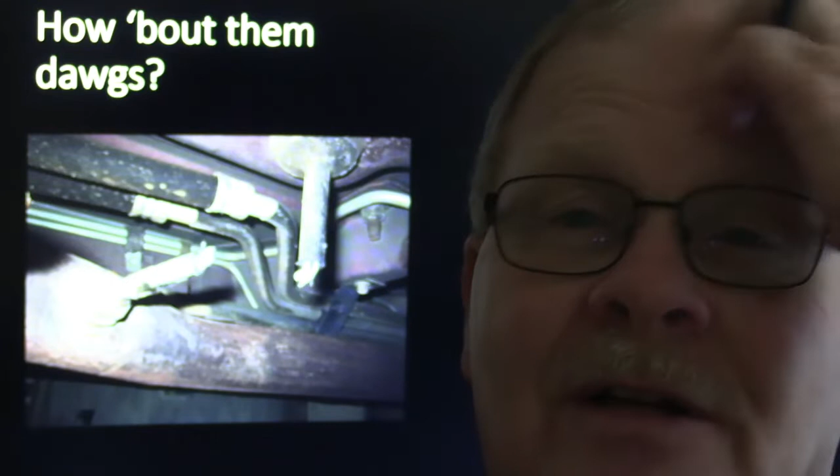Anyway, finally, on this lady's vehicle, after I put that second oxygen sensor in there, I got a piece of steel from the welding department and bent it, put some little ears on it and drilled them, and basically covered this thing up with a kind of steel splash pan so that dog couldn't get to those wires anymore. She didn't have that trouble anymore after that.

This is a choke on a '69 Ford pickup we worked on. I drove vehicles that had chokes on them back in the day, and you kind of had to know how to do that. You pull your choke to start it, and then as you warmed it up within the first minute or so, you worked the choke back shut, pushed it back in - that's actually a factory choke on a '69.

I think up until '72, Ford pickups still had a choke knob you had to pull on the dash, and I believe in '73 they went with an automatic choke of sorts. There were a bunch of different ways they did that, but these vehicles, a lot of them got to where they were like your lawnmower.

You know how you're the only one that knows how to start your lawnmower. If somebody else comes along, even if they're pretty good at getting stuff started, you know the combination - you know how you have to pull the choke, how you have to spin it and wait and do this and that and the other, and you finally get it going, and then it mows the grass good the rest of the day.

I've got an F525 John Deere mower out here, a '91 model. It doesn't take anything special, but it had a little starter solenoid and a small motor starter, with a little Kawasaki engine, oil filter and all. Pretty cool commercial grade mower.

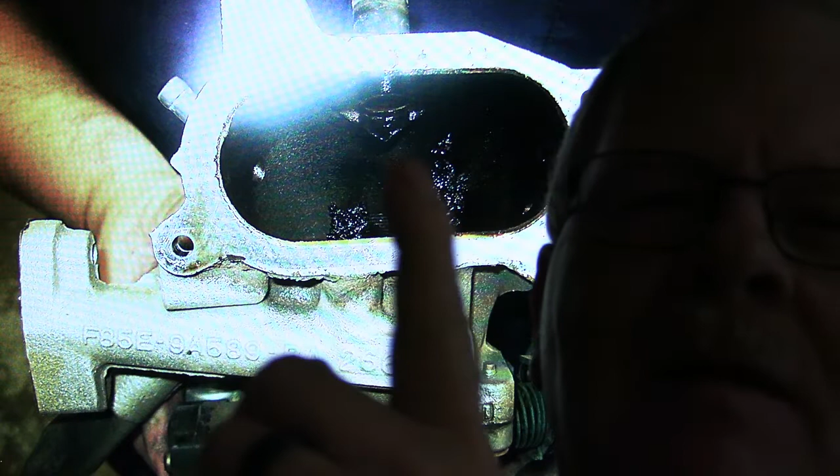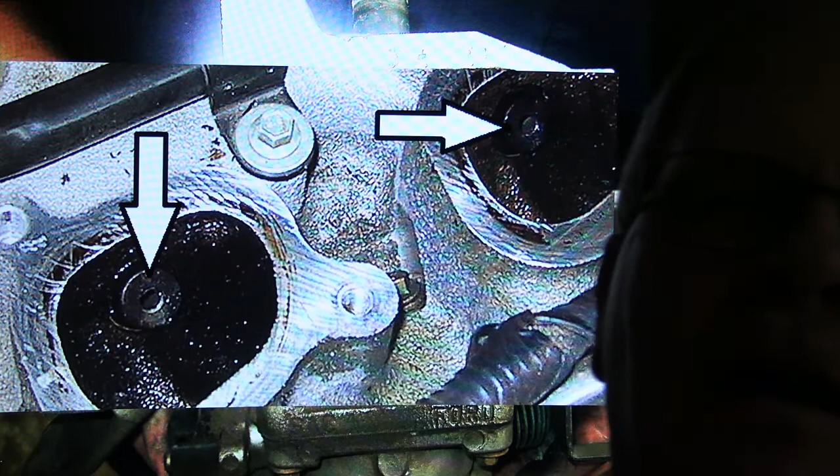Remember, if you try to flow EGR and you know the EGR valve's opening but the engine doesn't change sounds, you know you got an EGR flow issue, and typically it's going to be something like this right here on this Ford pickup. You see them big mountains of sludge that come up in there because of the EGR. It's a gummy, sludgy mess that likes to clog up all kinds of stuff. It also clogs up these little ports where it's got one feed to each, like on this 3.8. If all of them clog up but one, that one will misfire when the EGR valve opens. You'll have a misfire code and it'll shut the injector down while that's going on, and you'll be really confused about that if you're not familiar with how that works.

Another thing, on the gasoline direct injection engines, a lot of the times you'll have some carbon buildup on the intake valves for various different reasons. Of course, Ford and Toyota have started putting MPI and GDI injectors in there to kind of keep that washed off, but they have different strategies in the way that they work. The GDI engines are susceptible to the same kind of carbon buildup as the other ones.

You might remember the olefins that we had piled up on the valves back in the 80s, when they were putting those little black particles of olefin in gas with the idea it would keep the injector clean. Well, that was a disaster because those pieces of olefin would get trapped in the injector and stop it up, baking on there where they wouldn't clean off. Furthermore, those olefins would pile up on the valves and cause cold running problems. I've talked about that before a little bit.

A lot of times you've got carbon buildup in your intake, in your tumble valves and manifold control valves. A lot of times you'll have these valves that basically close most of the air off so that when it's idling, it leaves just a little bitty port in that flapper so the air goes screaming in faster. Then when you need more throttle, it opens up. Well, those get all sludged up and everything.

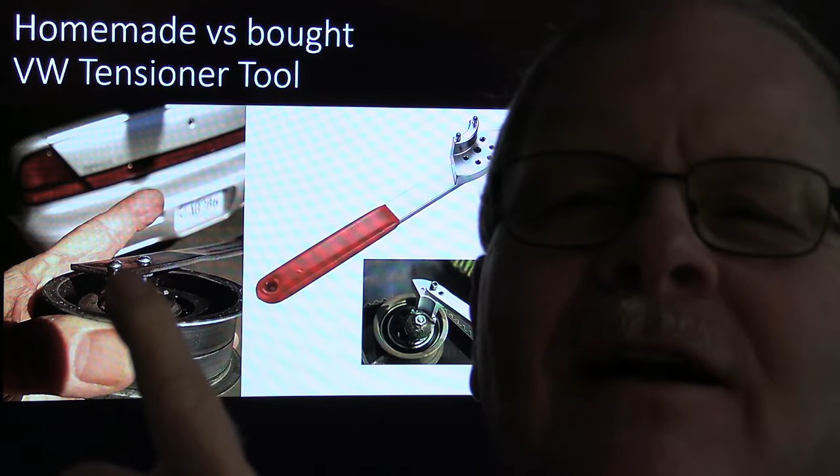However, there are some manifold runner control systems, like it started out in the '89 Taurus SHO, that would have flappers in there that would shorten and lengthen the runners based on what it needed for power and that kind of stuff. That's another story.

This right here, you can see my crummy homemade tool that I made with some bolts and a piece of flat iron to use for Volkswagen tensioners. They make a really good tool you can buy - I think that was made by Lisle on Amazon, and that one is a lot higher quality than this crummy cheap one that I made. But if you don't want to wait for a tool to get there, you don't have to worry about ordering one. You can basically build something that will work. I've got another tool a little bit later I'm going to show you that I built too.

I wasn't but like 18 years old at the time, so they jerked me out of the combine and had me rebuild a couple of those gas burner engines that was in them trucks. One way or another, the truck ran real good after, both of them did, after I built it. So I had to pull the motors out of there and all that.

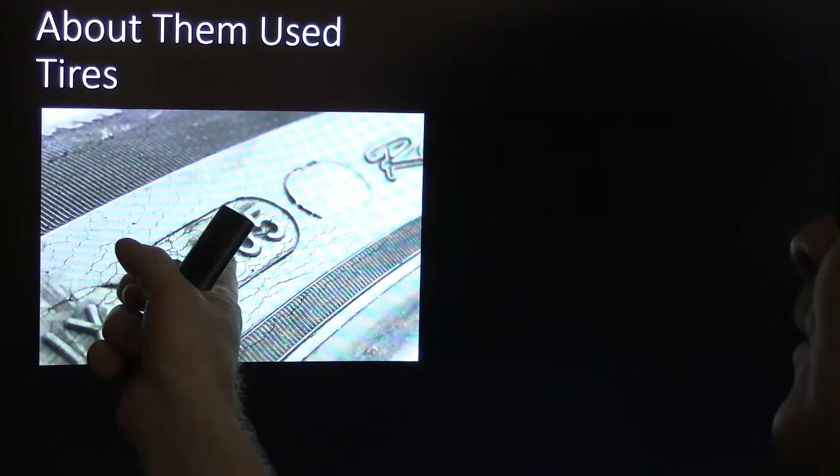I love the way this camera just gets crazy and tries to, you know, get out of focus occasionally.

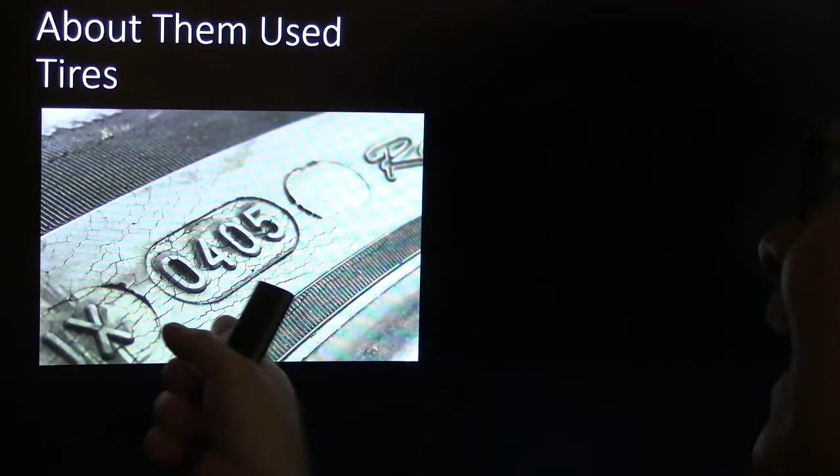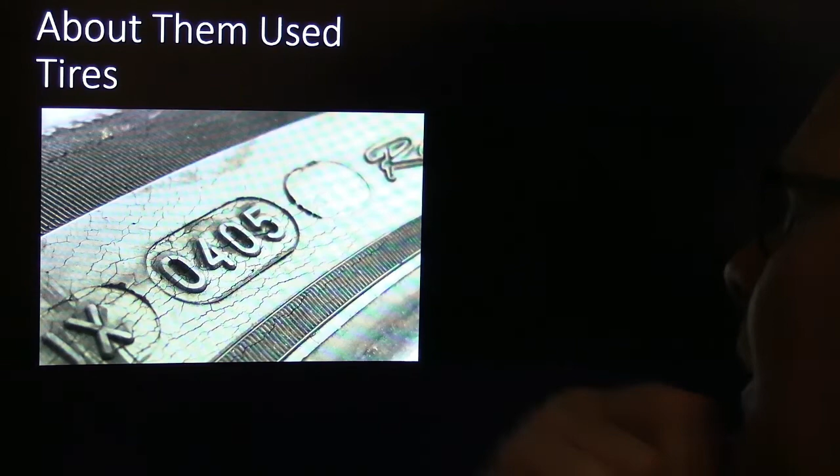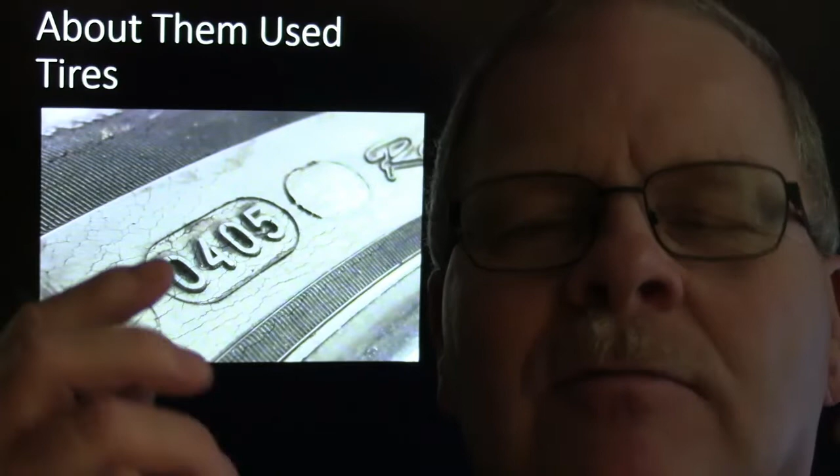And the wacky thing about it was I got my old 80 model Ford truck, and we dragged that thing over to this shop in Ozark, closer by than any other shop I had access to. We got it up on the lift right after we pulled it over there, and we had kind of heated the transaxle - it was like a 20-mile pull. Heated the transaxle up, you could put your hand on the final drive, it was a little warm, you know. But it was a junky old car anyway.

We had to replace the module, and on that one, if I remember right, it was one of the ones that had the crank sensor mounted on the back of the module. It went inside of the block, and you had to go under the back of the motor to do it. But anyway, we put a coil, a module, and a crank sensor on there, and it fired off. He never had any more trouble with it, at least until he got rid of it.

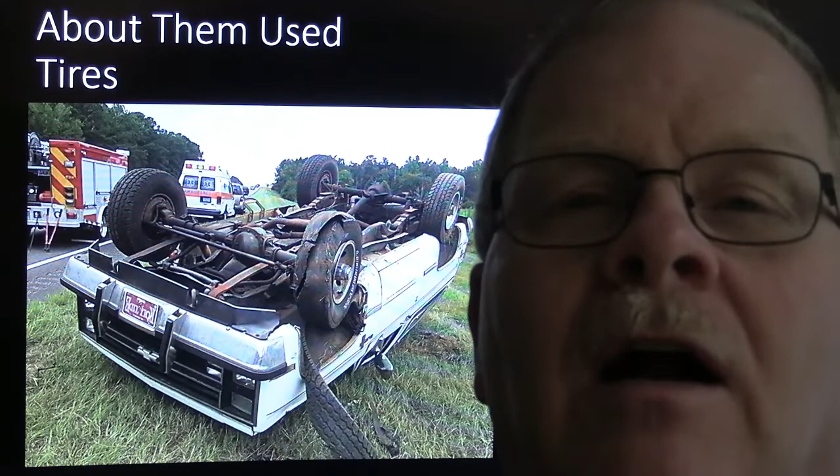Whenever tires are expired - and I've had other videos about this tire right here - whenever you look at these numbers, this was, see that, 04, 05. As I remember, that's the 4th week of 2005 when that one was made. And so, golly, that's confusing there - it could be the 5th week of 2004. Look that up, make sure I'm telling you right, that's stupid, I used to teach that. One of those numbers is going to be the number of weeks into the year it was made, and the other is going to be the year model. I can't remember which way it is right now, but either way, you can see all these cracks. Even if a tire's been stored in an air-conditioned warehouse with a bunch of other tires, and it still smells like a new tire, if it's more than 6 years old, you don't need to be using that tire on anything.

This is kind of the thing that happens on that. This was one of my students. He drove this '88 Blazer, and he was really happy with this thing. He had spent a bunch of time fixing the power windows and all that, and was fixing it up.

One day he didn't show up for class, and I sent him a text and said, "Where are you at, Daniel?" He sent me a text back with this picture, and you can see the tread came off of one of his tires. If you look at these other tires, they're about the same age and they all look really good. But the tires were so far expired, and the last thing on his mind was a tire throwing a tread and causing him to flip that thing over. Totaled it out. Didn't hurt him, he was okay. But that's one of the reasons you need to pay attention to those tires.

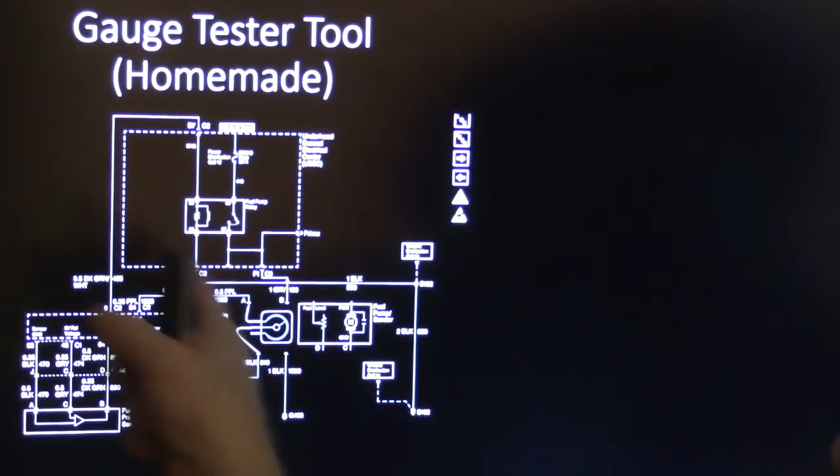Somebody else came back from town the next morning when we were loading up. That was all forgotten, and somebody started the motor up and burnt the engine up. So anyway, it had to have a crankshaft after that, but I guess that was the breaks of the ball game. I learned a heck of a lot from that 18-year-old experience.

I mean, I could rebuild an engine, but I double-gasketed an oil filter. Part of it was I couldn't see down in there. The other part was because I was sick when I did the job. So anyway, a lot of times we like to tell the story like we never made any mistakes, but everybody has made a dumb mistake sooner or later. Got to figure that out.

This is a little homemade gauge testing thing I used with a piece of speaker wire. I basically got the connector that I cut off of an old fuel pump, and I would plug that into the wire harness. On the other end of that thing, I had this potentiometer.

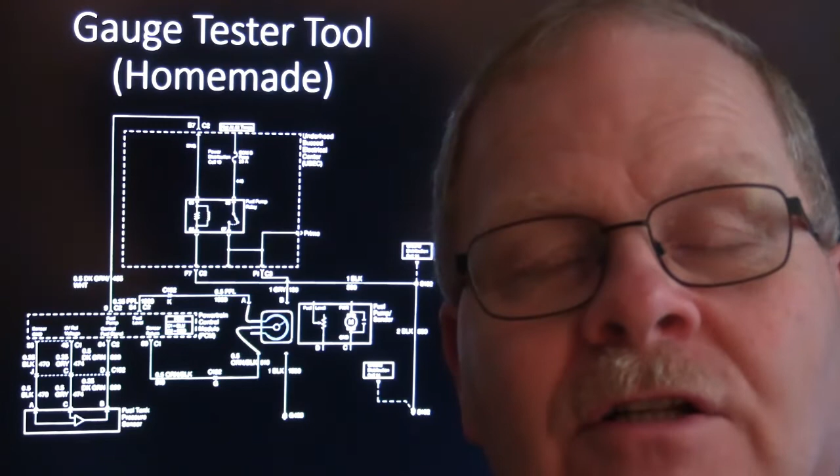You see a little potentiometer right there? I had a potentiometer that was spec'd with about the same kind of range, something within the window that it would operate the gauge. So I could plug that in back there where the fuel pump and gauge were plugged in, and with that long wire, I could go up there, sit in the seat, and turn the key on.

I could turn it because of the slosh part of it. You turn the key off, reset your little pot, turn it back on. You can actually measure the pot with your meter while you're doing this, and watch the gauge to see if it works. It's like a homemade gauge tester.

Now, there's been gauge testers made for years that have 3 little pots on them where you can turn them this way and that and dial in the resistance you want. I just needed that one pot. I got the idea from that, but I made my own that way.

Basically the way it works is this right here. You've got your gauge right here. This is like on a 99 GMC, because it's basically talking to the powertrain control module, which is sending information to the cluster and all that.

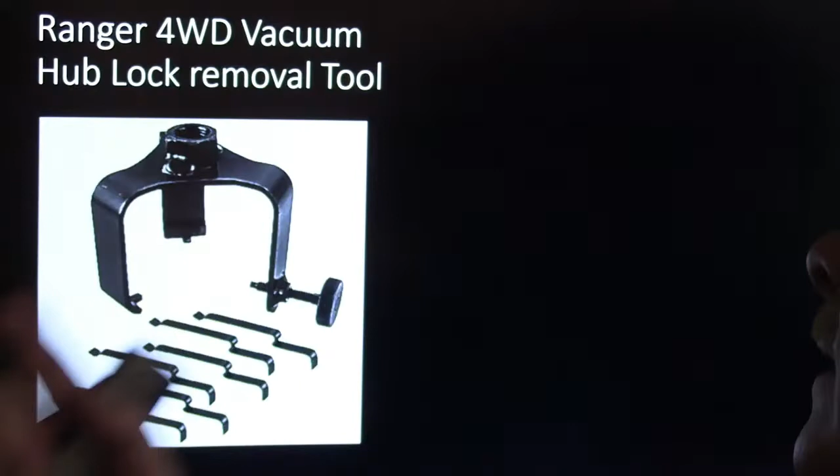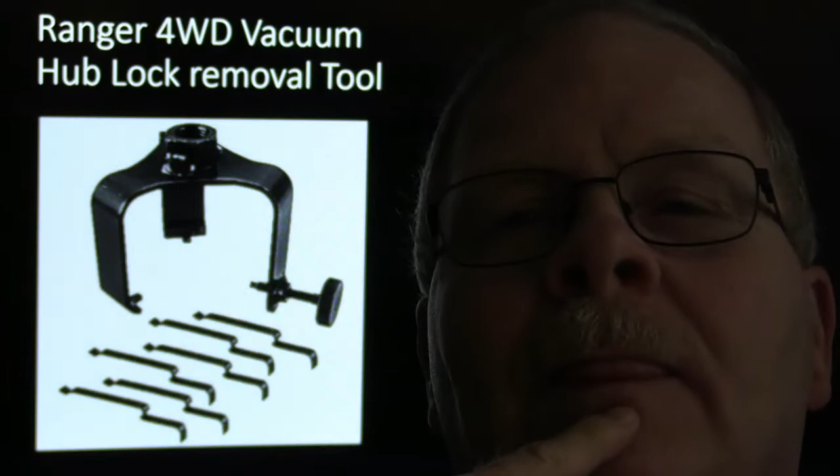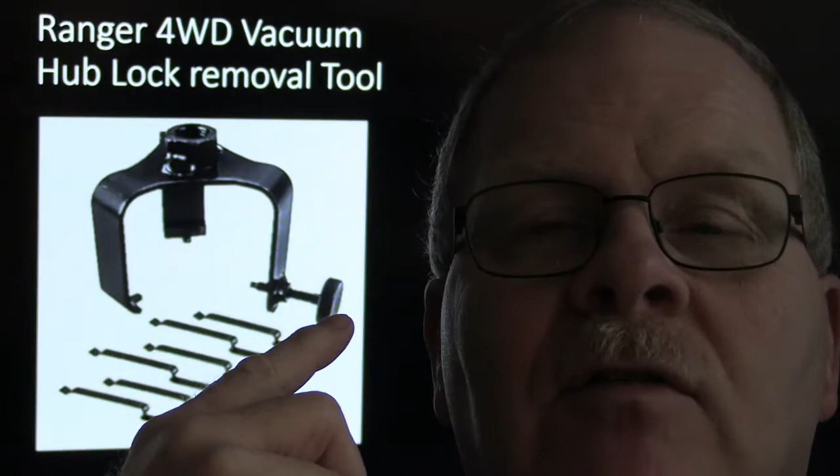You can also use this to test when your cooling fan comes on in vehicles - I've talked about that before. You can use it to trick the system into starting whenever you've got a temperature sensor, like an IAT, that's not reading right. I used to demonstrate it by plugging it into this Oldsmobile we had over there, which has one of those two-step sensors.

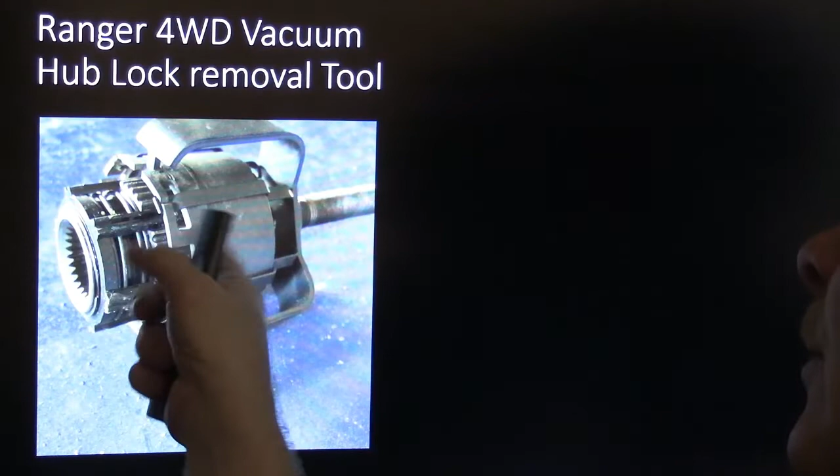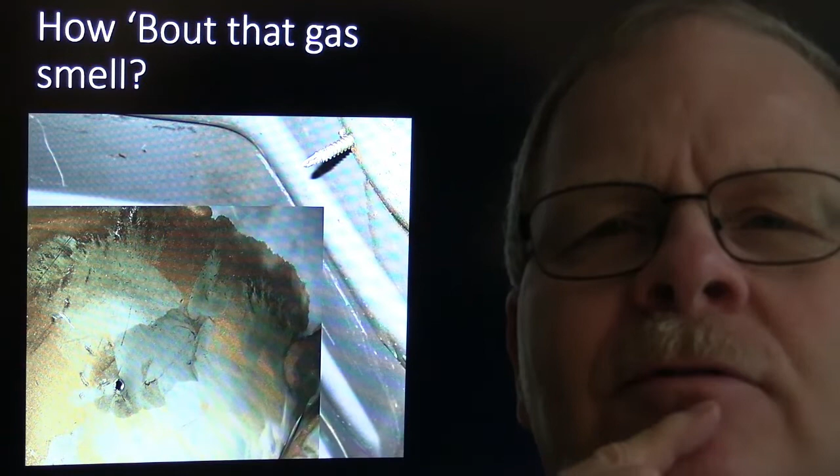You don't have to have the engine running really hot. You can crank the engine up, and if it's running, dial that thing in to the temperature on your scan tool and watch the fan kick on to see if it would or not. A lot of people don't realize some GM vehicles don't turn the fan on until 228 degrees, which sounds awfully hot, but that's just what they choose. If you don't want to get the vehicle really hot, you can dial it with that potentiometer hooked up to your engine coolant sensor, with the engine running. On some vehicles it'll work without the engine running, on others you have to have it running. When in doubt, start the engine cold, dial in a hot temperature, and see if the fan comes on - you can even see when it comes on and goes off.

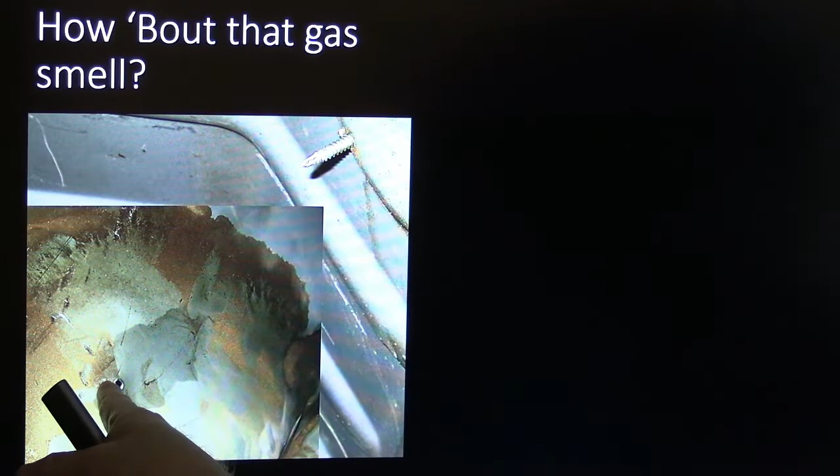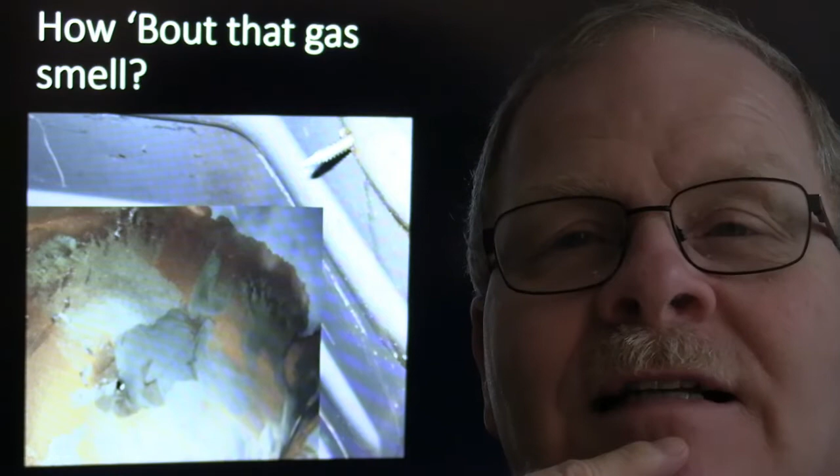Back when I was working at the Ford dealer, I would take a meter and back probe the engine coolant temperature sensor. I noticed on a Taurus the coolant fan would come on at 450 millivolts on that sensor, and I forgot what it would go off at. But I knew 450 millivolts was when it came on, so I could warm it up and look for that. If I saw it go below 450 millivolts significantly and the fan didn't come on, I knew I had some kind of fan problem, and I'd check for the fan motor being open or something like that.

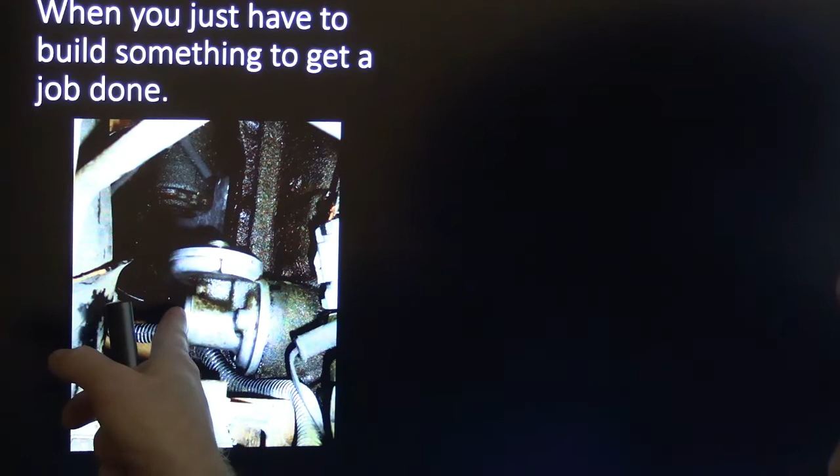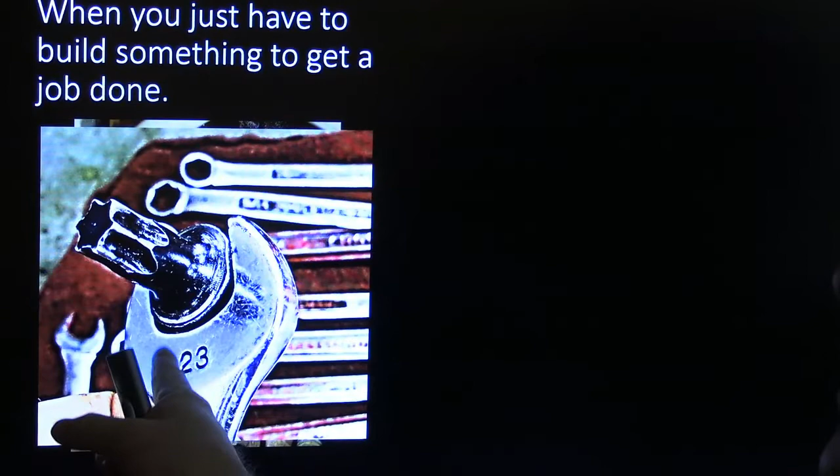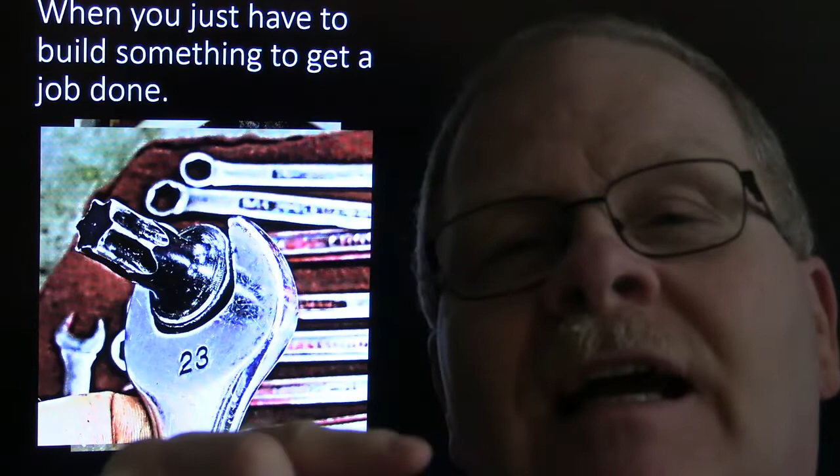This right here, how about that gas smell? Somebody comes in saying, I got a bad gas smell. Well, you get up here, pull the tank off, and realize this guy ran a screw in there to mount an amplifier, right on into the gas tank. That was fairly easy to figure out - he filled it up and you could see gas dripping out from under there. You go looking for where it is, and it turns out - you know how many times people just find a place to run a screw in without thinking about what's behind it - that's what this guy did. He said, that's a nice flat place I can mount my amplifier, and ran that self-drilling screw right into the gas tank. Everybody's about seen that too.

This right here, if you've seen this before - the 4-liter Jeeps have got this oil filter adapter.

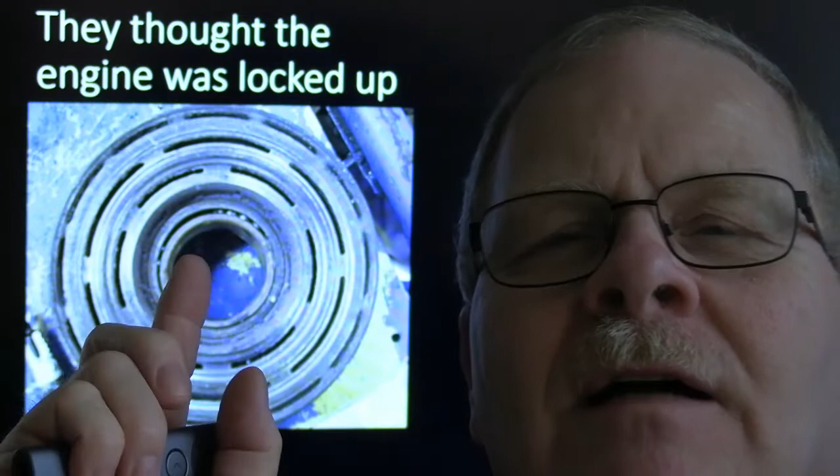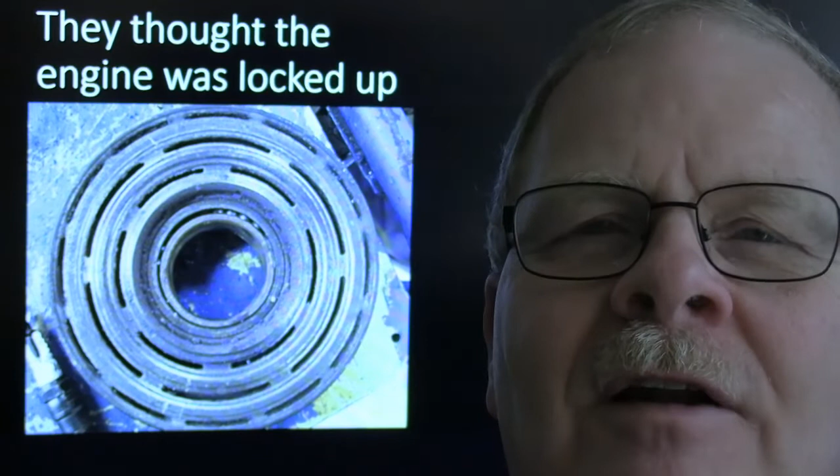Now there is a way you can do away with this, but if you're just wanting to fix it, take this big old T60 Torx. You got to screw that out of there, and there's a gasket right here that loves to leak, about the same size as the oil filter gasket. But anyway, you got to be able to screw that out of there.

And look at the distance you got. You got this much distance to get a T60 Torx in there. Now somebody somewhere might make a special tool for this, but I never even tried to look it up. If you're like me, you wind up in a situation where you want to get a job done.

So you look around, you see what old wrenches and tools you got in your box, and you grind around to make one. Well, this is what I did. I actually ground both sides of this T60 off where it fit real tight in a 23 millimeter wrench, and beat it down in there. It was beat in there so hard that you could hardly get it out. Because you know, when do you ever use a 23 millimeter wrench anyway? And that was with an old set of wrenches that we had. Anyway, we used that to go down in there and break that big T60 off.

Then you screw it out of there, replace the seal, screw it back in, and tighten it back up really good with this right here. That's just a little homemade tool I was talking about too.

It always amazed me how some vehicles just keep on running a long time after the bearing's gone, and this thing right here is still spinning on that shaft. They come in with noise and squealing belts and all. When you open the hood, you say, 'My goodness, how did this run as long as it did until it got to this point?'

It was always fun looking in there to see, if you got one that's giving you a problem, and you think some of the accessories might be making the noise, even though you may not be able to see it move. I like to take the belt off, spin all the pulleys, and see if I hear a noisy bearing or something like that. This one here had a bad bearing in this AC clutch idler hub.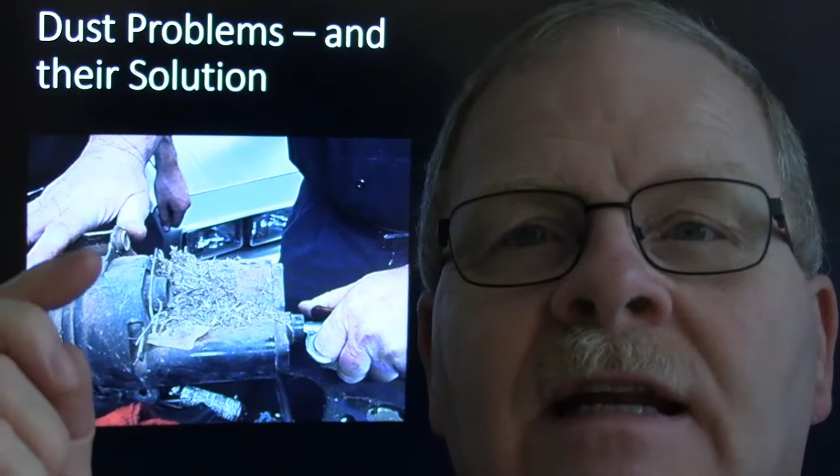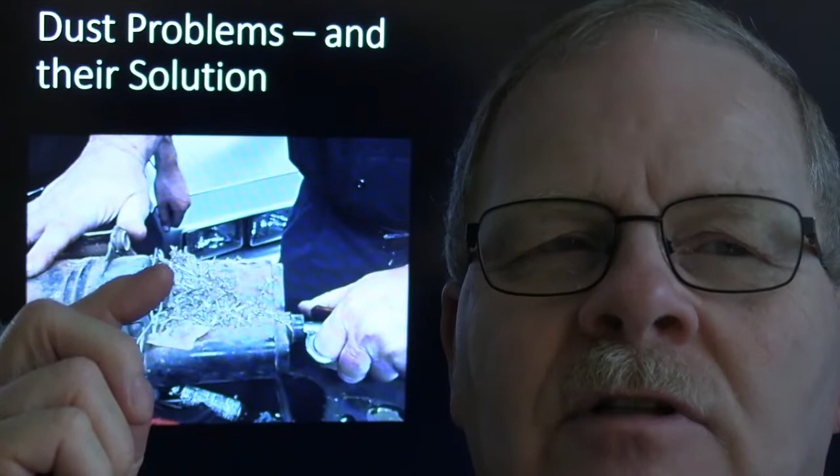When we got it, you could try to turn the engine with a breaker bar on the crank bolt, and what you wound up with was the belt slipping. Everything else was turning, the belt just slipped on that. So then you take the belt off, and the engine starts right up.

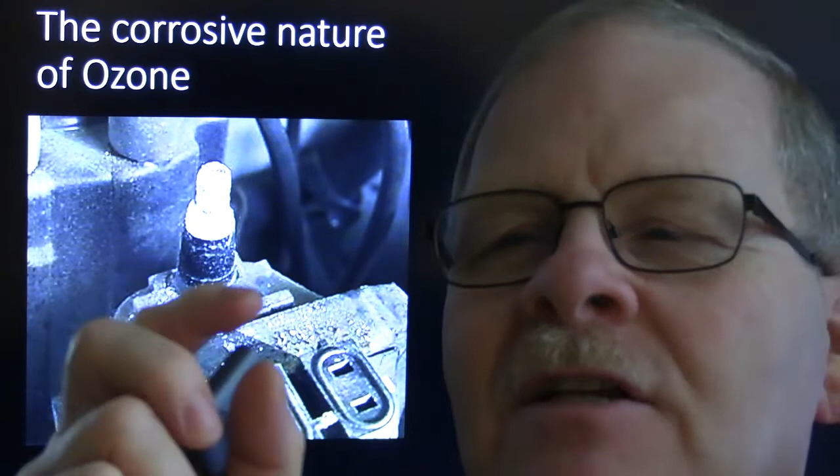I've known of shops that accidentally put engines in vehicles that had locked up water pumps and stuff like that. That's a real easy mistake to make if you're just assuming the engine's locked up. It's always a good idea to take the belts off and make sure the engine is actually locked up, because occasionally the starter will foul up and make it seem like the engine's locked up.

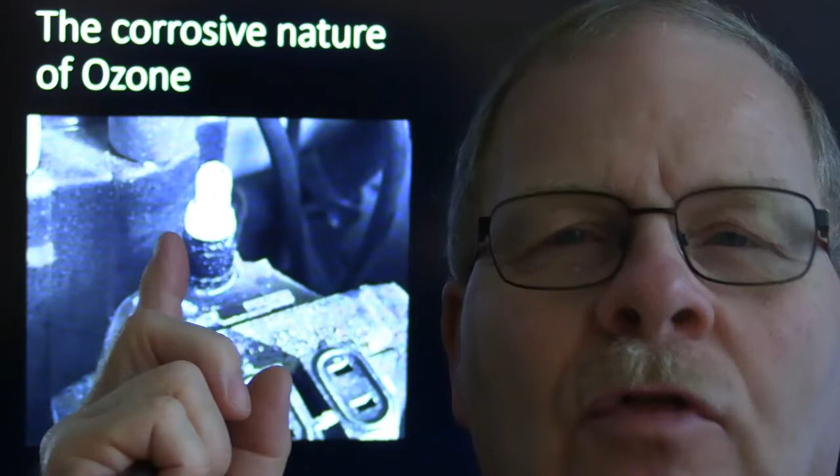So it's just a tremendously good idea to take the belts off first, then pull the starter off and continually check the engine with the breaker bar just to see if it's actually locked up, because sometimes you'll replace an engine that doesn't need to be replaced.

And in some shops, if you sell the customer on the idea that they need an engine, and then find out it doesn't, the owner of the shop may even want you to go ahead with the job just because he's already sold an engine. And that puts you in kind of a moral dilemma if you're somebody that's bothered by that kind of thing. It always bothered me.

We could get a P0446 code on some of these expeditions back in the late 90s, because these evaporative canisters, if you live in a dusty environment, would get clogged up with dust. You could stick your, the little vent solenoid screen, you can see it clogged completely up. Sometimes you can blow that out, but if you stuck your blower in here, a bunch of dust would come out.

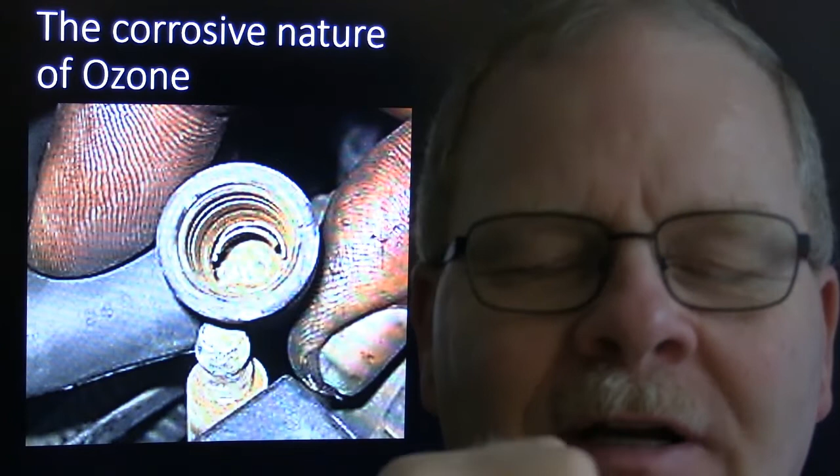Well, they came up with a filter. In other words, downstream of the vent solenoid, they'd have a really nice big filter that would stop dust from ever getting in here. Ford did that. This was something we used to run into a lot. I don't think it's much of a problem anymore because everybody's pretty well dealt with it, and unless you live in a farm community with a lot of dust in the air, you might not have ever seen this anyway.

This chalky looking ignition on these coils, I'm sure everybody's seen that. The reason that happens is because everywhere you have a spark, a naked spark, it's creating ozone as well as RFI, which we talked about a couple weeks ago. This ozone is created and trapped in there where it can't go anywhere. Ozone is O3, three molecules of oxygen bound together, and it's extremely corrosive, so it begins to oxidize that.

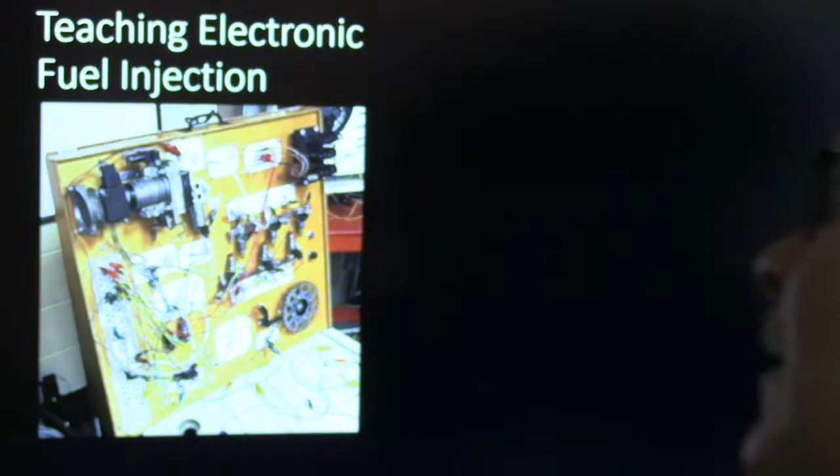You'll also see it in these plug wires. Basically that means you've had a bad wire for a while that's got naked sparks inside because it burned the fiber core of that wire out, and it's having to jump. When it traps that stuff in there, it looks rusty and oxidized because of that ozone. On some of the gray distributor caps Ford came out with, they had to put a vent in the cap to let the ozone out, because it would react with that gray material and make some gummy clear stuff that kind of looked like moisture and acted like moisture in that cap.

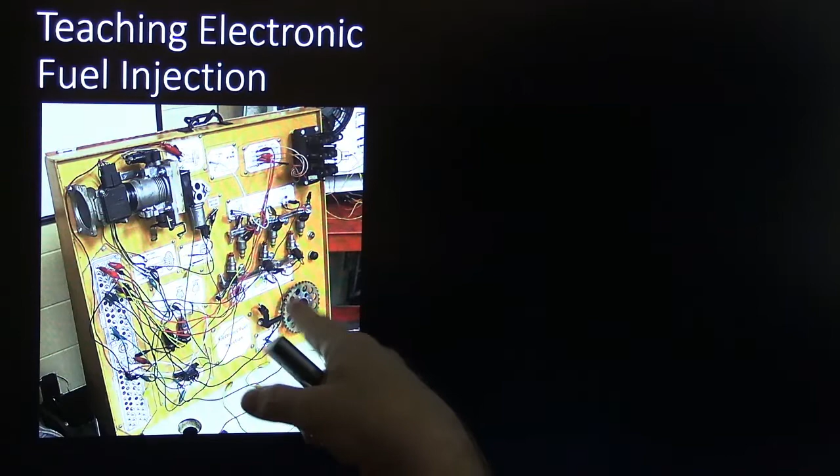It was only on the gray caps though. Of course, if you put a black cap on there, it's really bad to carbon track. Chrysler had some brown caps that weren't so bad, less likely to carbon track than those phenolic black ones. Those black ones were real pretty and shiny, but boy, they'd carbon track up a storm, and you'd be pulling plug wires to see which one was missing, and whenever you'd pull one of them, the engine would run better.

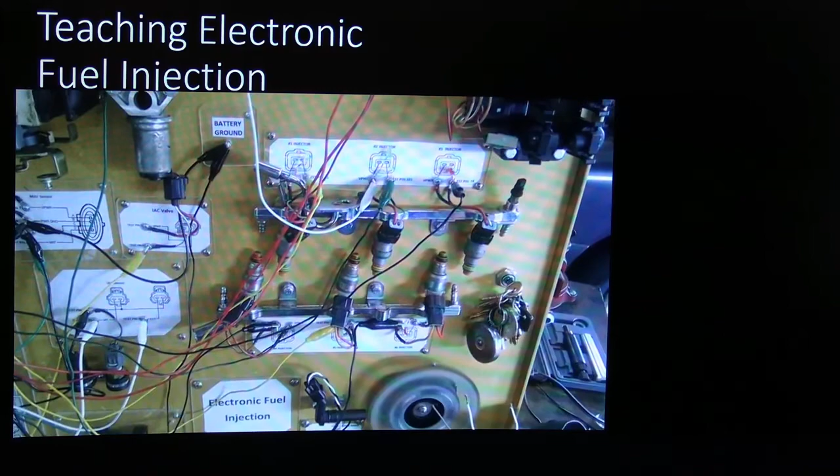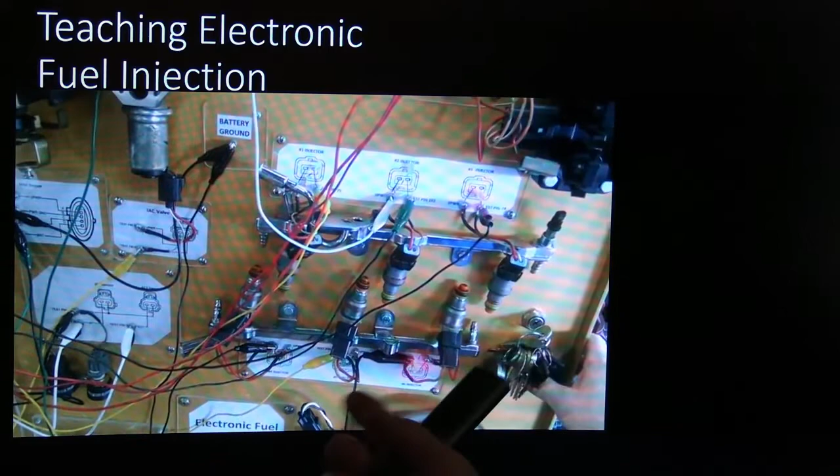I was working at the Volkswagen place, this was around 1983, and this older mechanic, probably 10 years older than me, was working on a car with a distributor. He was thinking out loud, pulling spark plug wires off looking for a skip, and when he pulled one off, the engine picked up speed. He said, why does it run better when I pull a plug wire off? I learned that working at a gas station, so I said, you got a carbon track in your distributor cap. He said, what's wrong with that? So he pulled it off, and sure enough, there was a big carbon track in there.

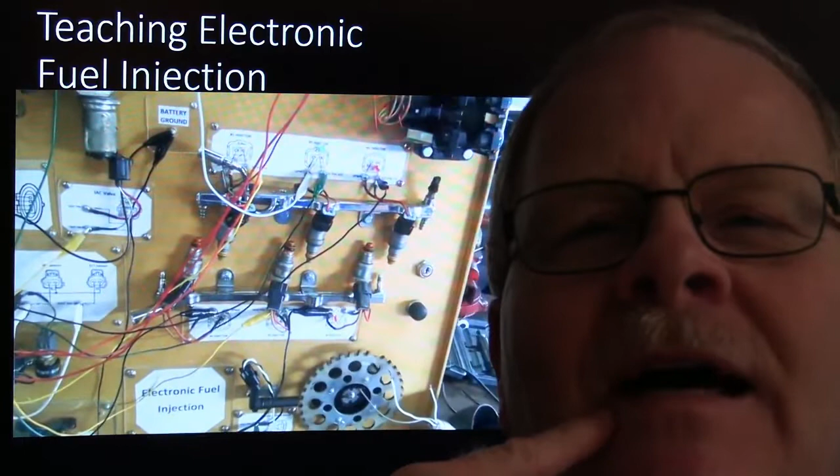You know, they always used to say that if you made a pencil mark in a distributor cap, it would jump fire and cause it to crossfire, kind of like a carbon track. I was going to try that as a trick on some of my students when I went to work at the college. I colored all in a distributor cap, but could never get it to run bad at all. Beat all I'd ever seen.

This right here was a teaching tool that I put together using the parts from a 98 Ford Explorer so that you can see fuel injection work right there on the board. You might notice I've got a fan here, like a computer fan, pulling air through this throttle body so that whenever you open the throttle body, you'd see the airflow increase. You could also watch the injector if you hooked up a scope.

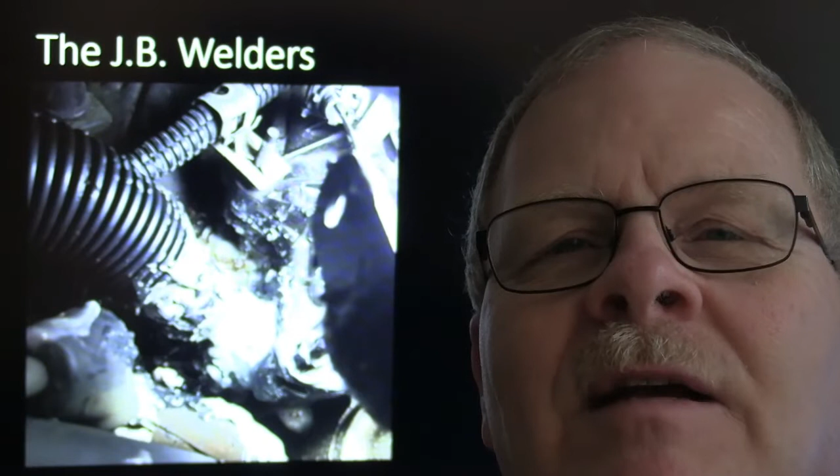Now whenever I turn that key and it starts, you can see it blinking all of the lights at the same time. This video is actually on my YouTube channel if you'll just look up the word fuel injection and see how they started flashing sequentially after it picked up speed. There's a little spinning next to the crank sensor, and I had a button down there you had to push to shut it all down.

I got a little funny story about that. See them sparks popping up there? One time I had a good strong battery connected to this thing, and I wanted to just keep talking about it while I was standing there next to this board teaching my class. I stood there with that thing, with them sparks popping and that wheel spinning, and I was just talking and talking and talking.

What I wound up doing while I was talking to them, with all that sparks popping, I must have been talking for 5 minutes, and I started getting kind of lightheaded. It was crazy that I got as lightheaded as I did, because I was breathing that ozone. I didn't think about it. You could kind of smell it, like a burnt motor or something. But I was breathing that ozone, and I started getting lightheaded, and I had enough presence of mind to realize I was breathing the ozone coming off those naked sparks.

That was just incredibly duh-head, I mean the only time that ever happened. But I was thinking, you know, somebody wanting to get oxygen drunk, I guess that's the way they could do it.

How about the JB Welders? How many times do you get a vehicle in there where somebody had a coolant leak or something like that, or even an oil leak or whatever, and they cleaned it off real good with brake parts cleaner, and just smeared JB Weld all over it.

You got to work around that stuff. It's kind of a mess, and unless you replace the components, you're not going to be able to have a really nice looking job. You're just going to have a job where you replaced a part, had to tap the threads out since it was pipe threads, and put a really good looking part in there with a crappy old JB Weld all around it when you get done. As long as it doesn't leak, it don't matter, I guess.

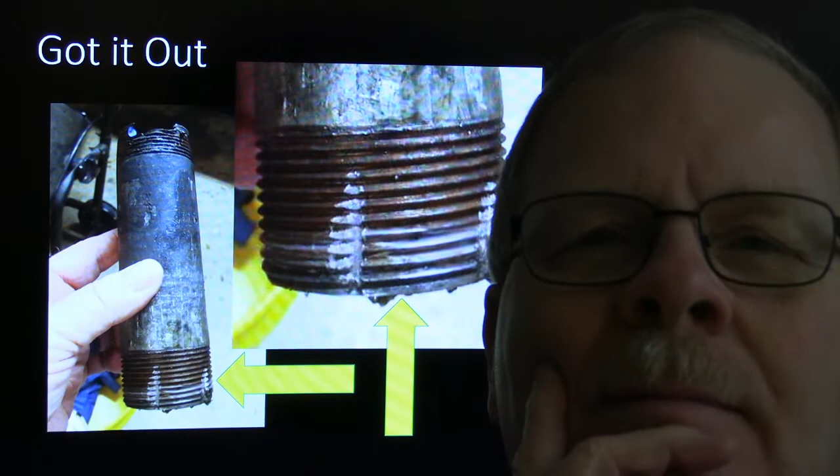This right here, believe it or not, is a pipe that was in my kitchen. This thing had been in there for 52 years, because I know when this house was built, and it was leaking right here, just dripping out, because that pipe had rusted. Now right here you can kind of see where I temporarily wrapped some black electrical tape around it, just to give me a little chance to gather my materials and get ready to fix it and put some time aside. It's just a drain coming from the kitchen sink going into the wall.

So I wrapped that tape around it, and I cut the tape off of it on a Saturday morning, last Saturday morning as a matter of fact. I mean, not the last Saturday morning to y'all, because you're going to be watching this on Monday.

It was Saturday, a week ago by the time you're watching this. I cut that tape off of there, and I said I'm going to need a pipe wrench. At first I half-heartedly tried with this 12-inch Ridgid pipe wrench I've got, and I said there ain't no way.

That's a 1.5-inch pipe, been in there 52 years, rusty and cruddy. So I went to Harbor Freight and paid $32 for this aluminum 24-inch pipe wrench. I started to get one that was 14-inch or something, but said no, I need to get this big one. I put that sucker on there and, like I was bench pressing something, pushed up on it and screwed it out of there.

That's what the pipe looked like. Now the problem I had was the threads were all screwed up, because look up here, you see how some of that pipe stayed in there?